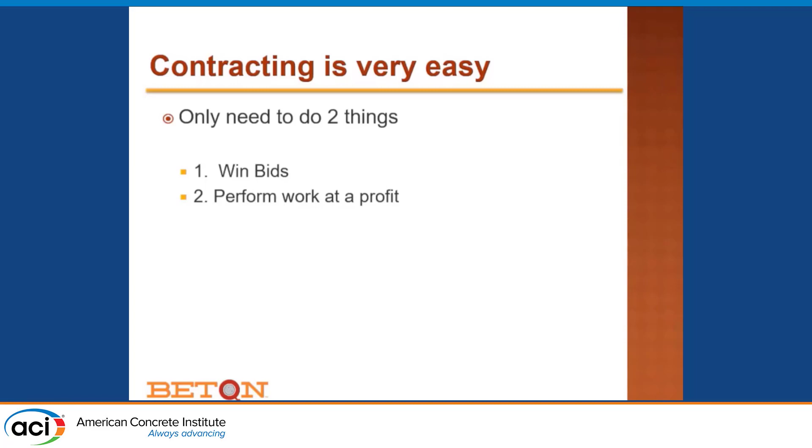But I also know, and I've told Bruce this a couple of times, that contracting is easy. I don't know why everybody complains about it. It's the easiest thing in the world. Engineering, we have to worry about loads and people we're never going to meet, and uncertainty and tolerance. Contractors, dead easy. You just have to win bids and then perform them at a profit, right? If you don't do both of those things, then it doesn't matter. This is so simple. And often the problem is that you've won the bid thinking that it says one thing, and then you try to perform it at a profit, and you find out that there are some expectations that you may not have been aware of.

I see there's a fellow here in the lower left-hand corner with a beard. He doesn't have a Hawaiian shirt on. He's wearing a Roman-style Hawaiian shirt. It's made of plates of steel. This is on Trajan's Column. They're building the bridge across the Danube. Up in the corner, they're mixing concrete. The architect and the engineer have come to the site, and they are looking up for inspiration. The last thing they want to do is look down and see how out of tolerance construction is being made.

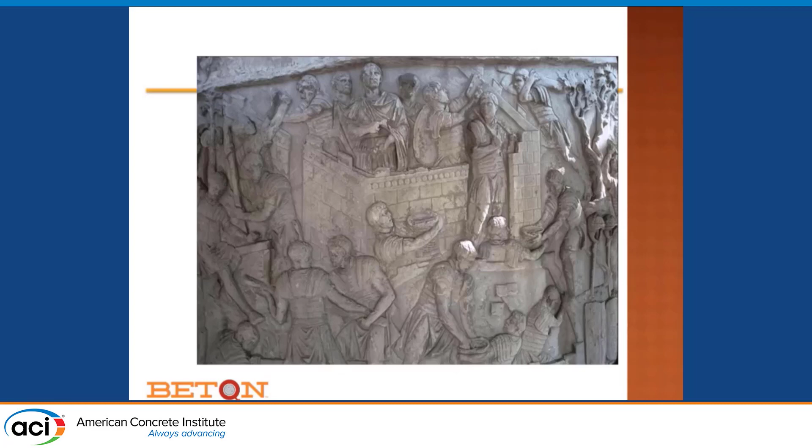One of the things that Bruce contributed to this process of concrete construction is the understanding of who's responsible for what. If you have a problem, and problems occur in construction, is your repair a betterment? Are you repairing something because it wasn't constructed properly, but building it to a higher standard than it was originally specified to meet? That's a betterment, not a repair. The other that we see all of the time is the passing of the requirements of the building code, ACI 318, back to the contractor.

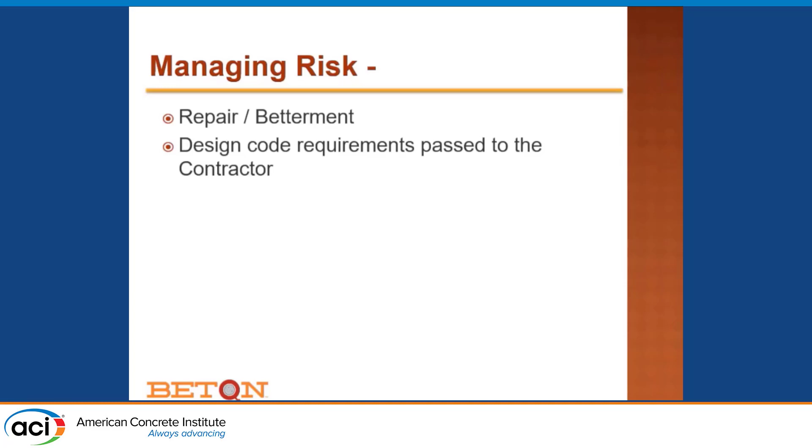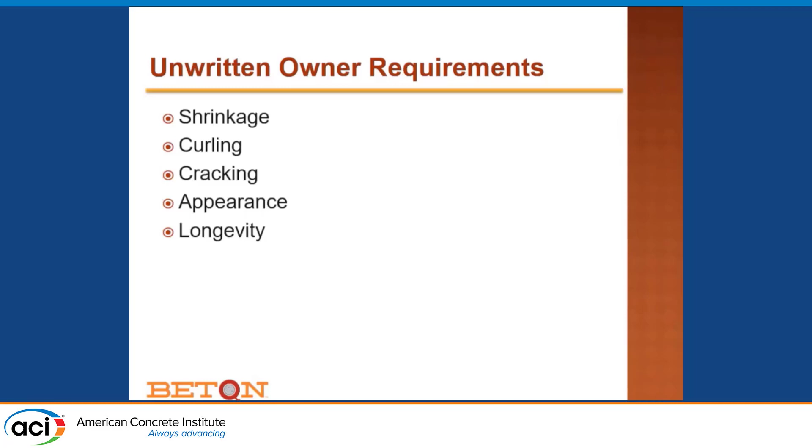It's totally inappropriate. Bruce has written volumes on that very topic, because we have a bunch of unwritten owner requirements that we only find out about during the execution, during phase 2. You've got the bid, but you wish now you didn't. You've won the project. You have problems with longevity, with appearance, with cracking in the structure, curling of slabs, shrinkage of the concrete, all of these things that were implied but not stated in the specification. And to make sure that it gets covered fairly.

A lot of cases, workability, finishability, strength gain, cold and hot weather, Bruce has worked on all of these aspects to get an understanding between the contractor, the designer, the subcontractor, the material supplier as to what it is that we're actually going to try to execute. And he hasn't done so to the sole benefit of the contractor. Mike Ahern quite clearly stated that it's always to do what's right.

And we don't use this type of information. We don't use anecdotal evidence that once upon a time this guy put some fly ash in my concrete and the concrete opened up and I could see straight down into hell and there was a devil and he was eating fly ash and I knew it was a problem and that's why the issue occurred. Instead, we use data. And here's some perfectly reasonable data.

This is the total U.S. highway fatality rate and the fresh lemons imported into the USA from Mexico. So clearly, whatever is being drunk with those lemons is causing fatalities. This is the famous causation and correlation.

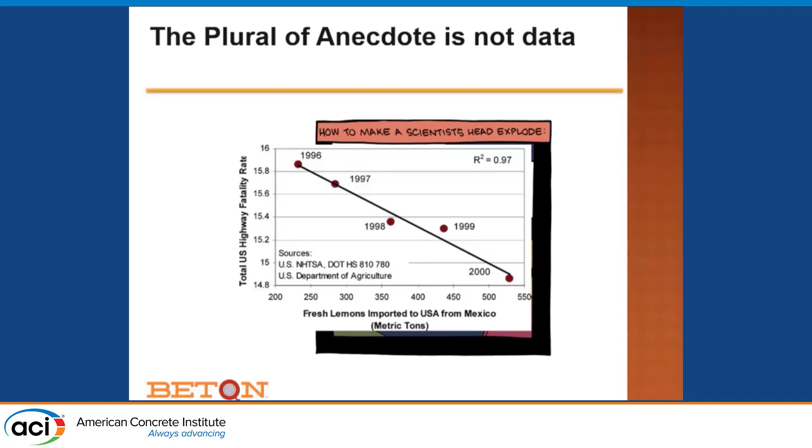But we have to remember that people no less than Bryant Mather tell us that we have failures in construction that occur only for two reasons. Number one is the contractor didn't follow the specification. Very rarely do we talk about the second part. The specification was in error. It couldn't be constructed the way that it was written. And that becomes a problem.

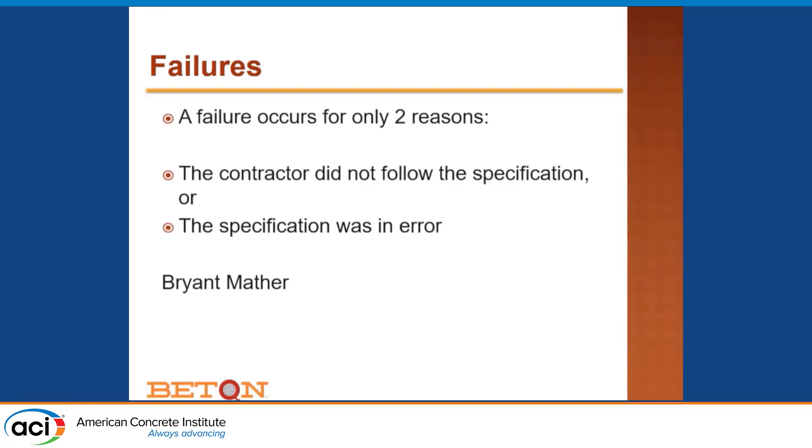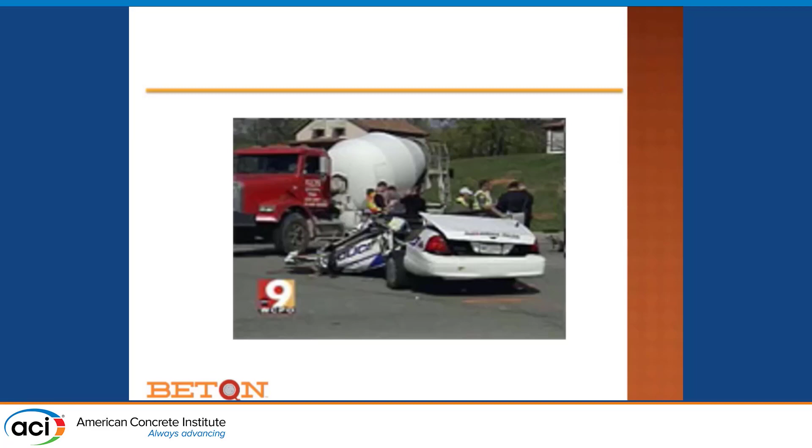I've done an awful lot of work in concrete with almost no Portland cement in it. But I've done that work cognizant of the fact that you actually have to build with it. I can make stuff in the lab that is fantastic. It has great performance, it has high strength, it slices, it dices, it makes julienne fries, whatever you need that concrete to do. But you have to cure it at 100 degrees Fahrenheit for 7 days. How are you supposed to do that on the site? I'm just a lab guy. That's not my problem. Bruce never took that approach. Bruce took the approach of saying, you need to understand.

And often what happens is that I would develop mixtures when I was at Semstone that would have very little cement in them, and someone else would try it without understanding the admixture packages that were going into making it work. And then 3 days later, when the concrete won't set, they call up and say, your mixture. And I said, what do you mean my mixture? It came out of someone else's ready-mix trucks. But we got to fix that anyway. So you need to be careful.

And this is the type of advice, the type of practical, sound engineering judgment that we all need more than ever as we creep towards a situation where we use as little clinker as we possibly can. And there are going to be consequences. And we're not changing away from Portland cement because we think that it doesn't work. We're changing away from Portland cement because there are political ramifications and emission ramifications to its use. So we need to understand how they're going to work.

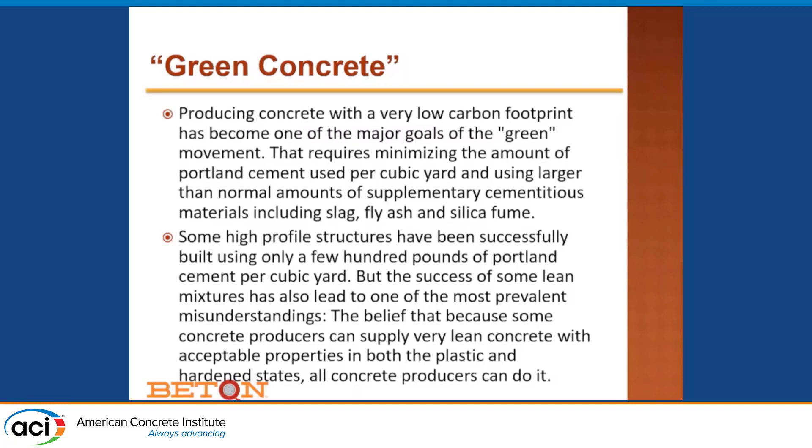Where did all of this come to? It came to this type of document. When I was running NRMCA's P2P committee, we needed to have some documentation that was more than just, we know what you need, we'll put it into the concrete, you can trust us, right? That violates number 2. You've got the bid, but you really don't want it.

I put this up to scare Bruce. I think this is a very nice archaic antique, used more than a century ago to measure some property of concrete that isn't really very important. And we still use it today because we need to have something to do with those broken tape measures, otherwise we'd be throwing them away.

Imitation being the sincerest form of flattery. When I've written specifications, I write them that the slump shall be consistent with the method of construction with no visible signs of segregation, and we describe segregation using an ASTM test method. And it's very interesting to watch the reaction of the testing agency that says, well, what is the slump supposed to be? Whatever the contractor needs it to be, who cares?

Well, how will we know what we're measuring to? Well, the specification goes on to say you have a 2-inch range. It'll be on the ticket. Well, how will we know that that's the right number? Yeah, you're not getting the whole picture here, right? I mean, the slump is very good if you're a ready-mix producer. Use it all the time. Are we making the same concrete? Because if we don't have the same slump coming out of the plant and we think we made the same concrete, we're bullshitting ourselves, right?

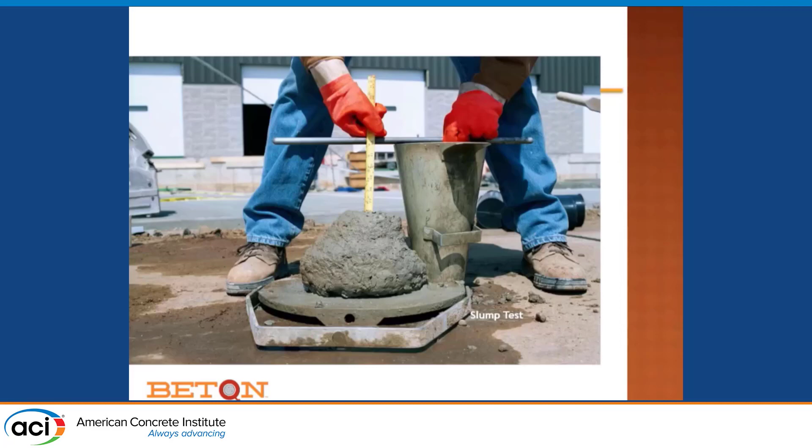But if you're now going to place the concrete, if it's a 2-inch slump or a 12-inch slump, I guess if you're a Puritan, a 2-inch slump means that the laborers will work hard and they'll be tired and won't go out and do any carousing at night, and that will be good. Although laborers that get tired and use that as an excuse not to go out drinking usually aren't very good laborers, in my experience. Right?

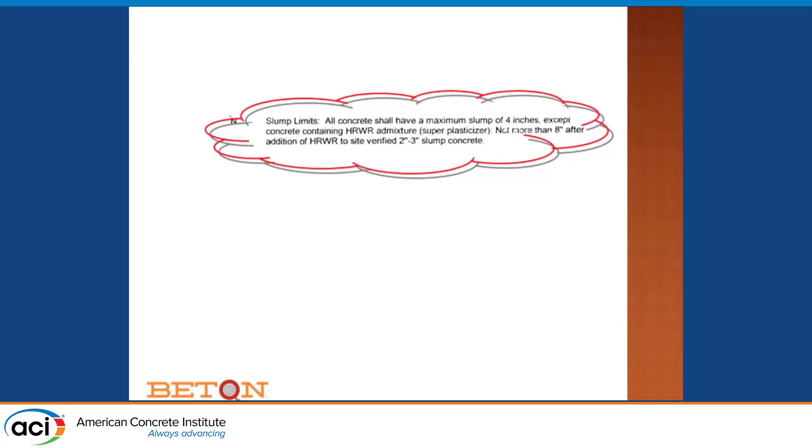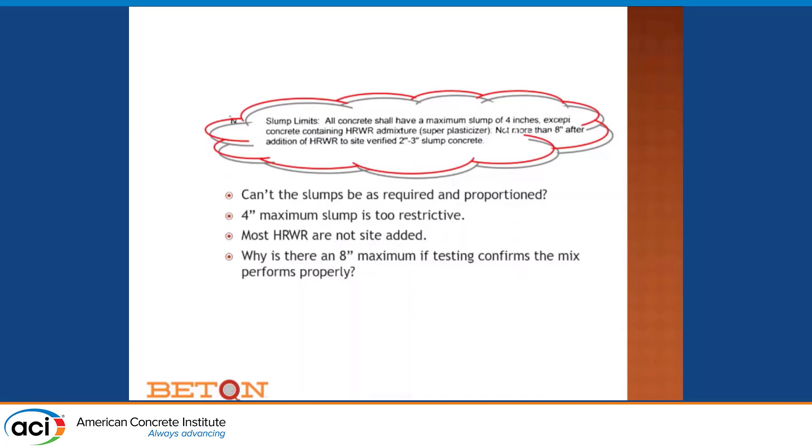We still see specifications written like this despite the work that Bruce has done. But Bruce has shown us the light that we can all go along. You can add high range water reducing admixtures being added at the site. It's the dumbest thing you can do. It's the best way to get air into concrete that's not air entrained. Can't we have the slump as required? All kinds of problems with this construction. And sometimes it's because we rely on the quality of our concrete based on measures that are not good measures of quality of concrete.

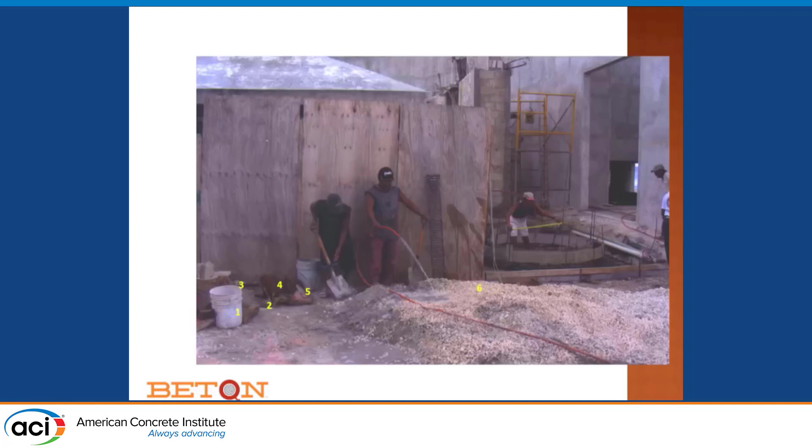I counted here. You can see I've labeled them for our use. This is a 6-sack mixture, so you don't need to worry. You can see that there's a couple of things going on here. One is that the batchman and the yard man are getting ready to mix, and the contractor's been worried about yield. That's why he's back there measuring. He says, those guys are way too happy. There's something going on. We have to understand all of these tolerances, and a 6-sack mixture is a silly way of doing things. Similarly, self-consolidating concrete isn't always magic.

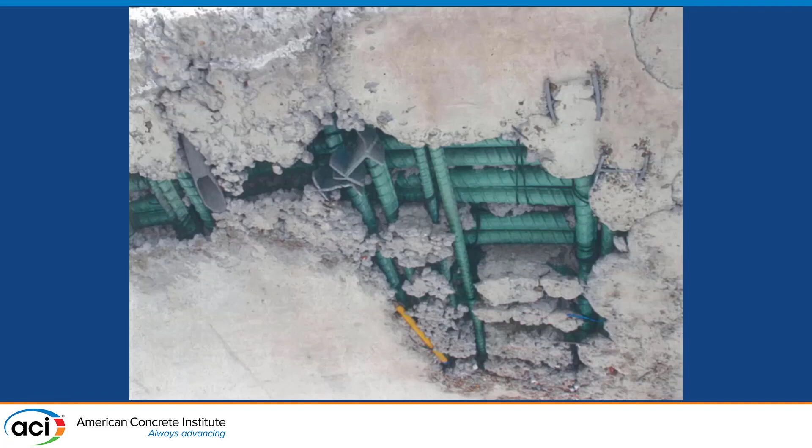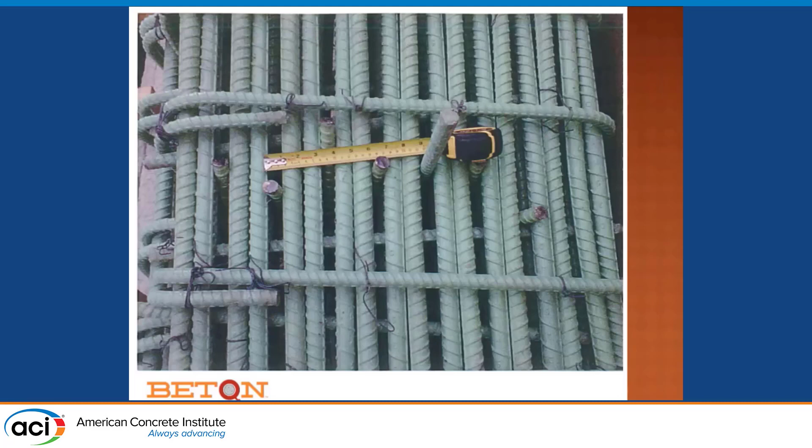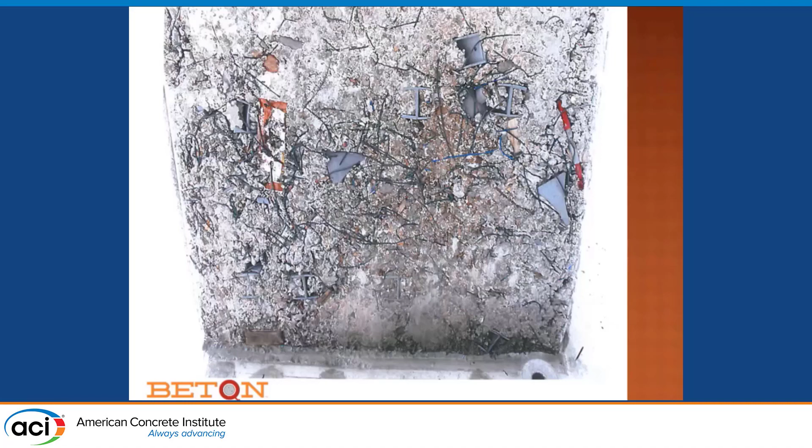A lot of concrete is done with a tolerance. The nice thing is you can find your pencils afterwards. There might be a little bit of steel in this structure. And no matter how good you are with self-consolidating concrete, you probably can't make that work. I wish this was other than a real project. You need to clean up your site. Otherwise, you find out where all that wire that you cut is inside of the forms. This is architectural concrete, right? We have a lot of definitions of concrete exposed to view.

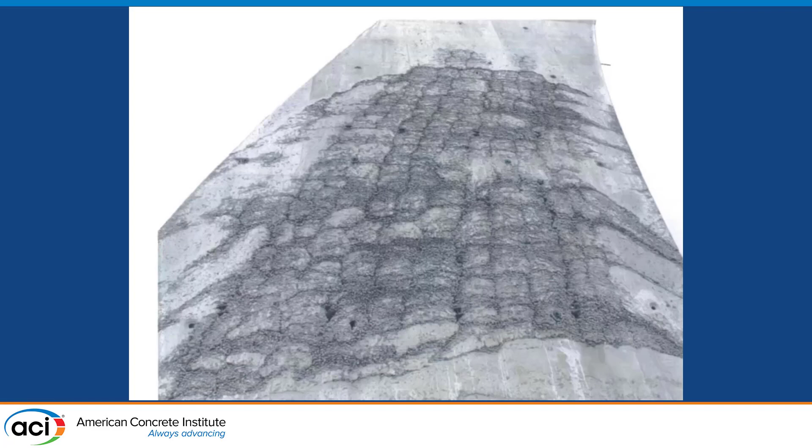And finally, if you don't understand the placing techniques, there's no magic. This was Bruce's great contribution, to continue to apply data and reasonable engineering approaches to solve problems. These are people who believe that self-consolidating concrete was somehow magic. It isn't, as you can see. Bruce, working together with Ward, would routinely challenge the orthodoxy in this industry with actual data. How to plan a cold weather concrete pour is a fascinating article. It's getting older. I mean, it's not Bruce old, but it's old. And you can read it, and it's still very useful.

You can barely make out free fall of concrete. Free fall of concrete is something where the specification will say concrete shall not be allowed to fall more than 6 feet. If you read Bruce's work, that seems to be a fairly arbitrary number. It's almost as arbitrary as what's still in ACI 306, that the concrete can withstand one freezing cycle once it reaches a strength of 500 psi. Because why? Because 500 psi sounds like a nice round number. Does it come from anywhere? Probably not. But let's take a look at some of the things that Bruce has contributed to.

If we go to hot weather concreting, it will tell us that one of the ways to avoid plastic shrinkage cracking is to erect a windbreak. This is a table from one of Bruce's publications showing you the windbreak type that you're using and how high the windbreak has to be, which is H, to protect a zone of width W. And so it points out correctly that to protect a 30-foot wide placement, you need a 4-foot high piece of plywood or something else solid.

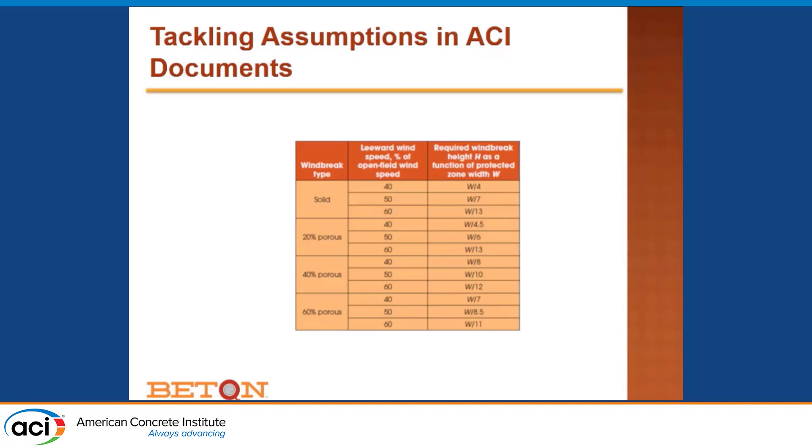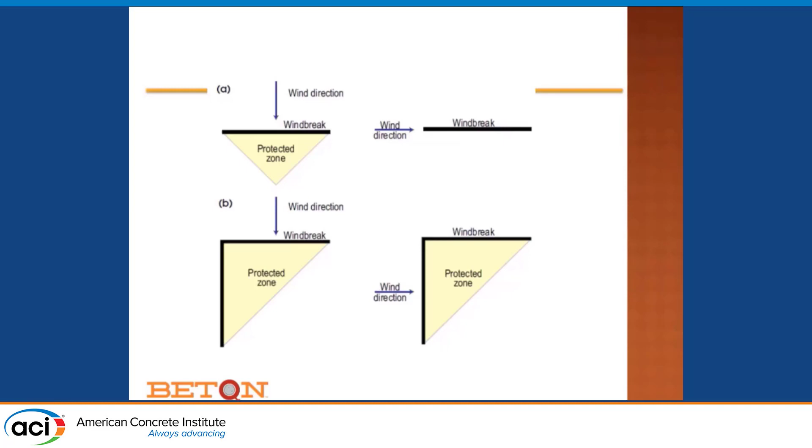What that's anchored to when the wind is blowing at 50 miles an hour could be very interesting. So this type of information and where that windbreak really protects leads us to very practical solutions of saying erect a windbreak. It sounds like a great idea, but what is the geometry of that windbreak? Bruce did the calculations.

Massive embedments, still a big problem. We watch in Minneapolis every winter people going around with a weed burner trying to raise the temperature of steel in the air at 20 degrees or at minus 20 degrees. And it probably gets up to above 32 degrees for a few seconds, but it rapidly radiates the heat away.

Work done very recently shows that a number 14 bar, for that matter anything smaller than a number 18, are not massive embedments. They don't need to be heated. And this was done not because it's easier for the contractor. It's done because we're wasting time and effort heating up bars that are going to heat up in the concrete anyway.

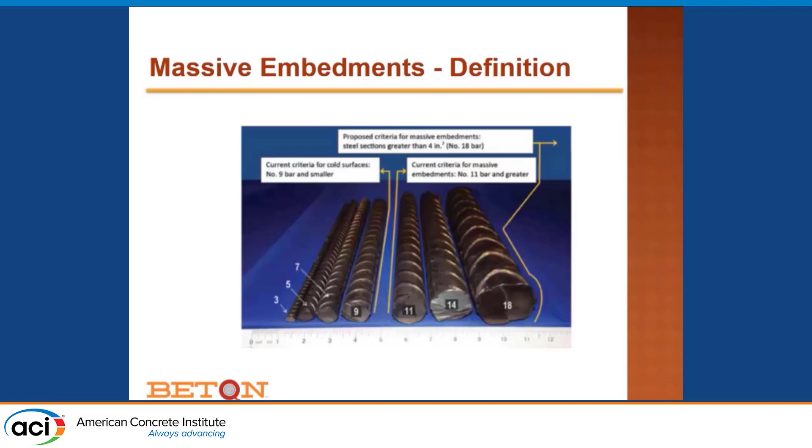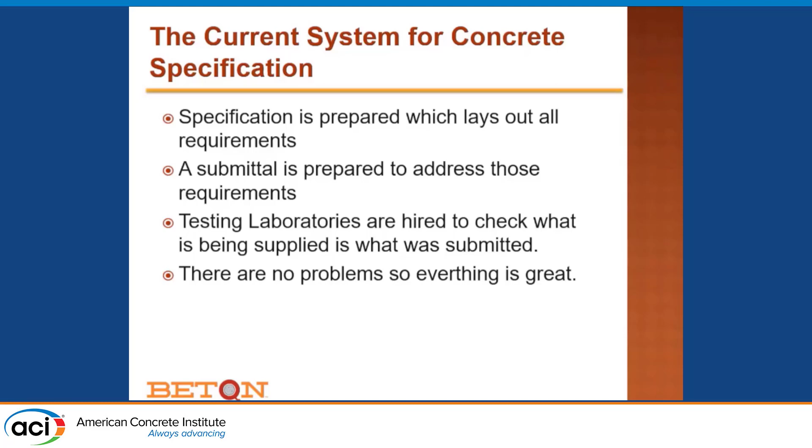We have lots of problems with our current system, and Bruce has been able to help us out a great deal, right? The current system works well. The specification clearly lays out everything you need. A submittal shows that the contractor follows those requirements. A competent testing lab is hired to check what's being supplied, and there are never any problems, and everything is great, right? And Bruce is among the first people and the leading person to highlight that's not the case.

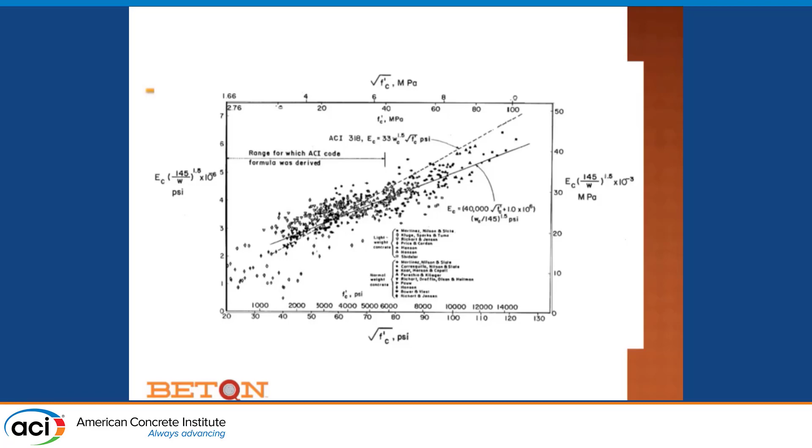How often have you been exposed to a specification that gives you a requirement for modulus of elasticity? This is the equation that is found in 318 for modulus of elasticity. The equation would be those straight lines, not the very large scatter of a couple million psi that occurs in all of the data. Right?

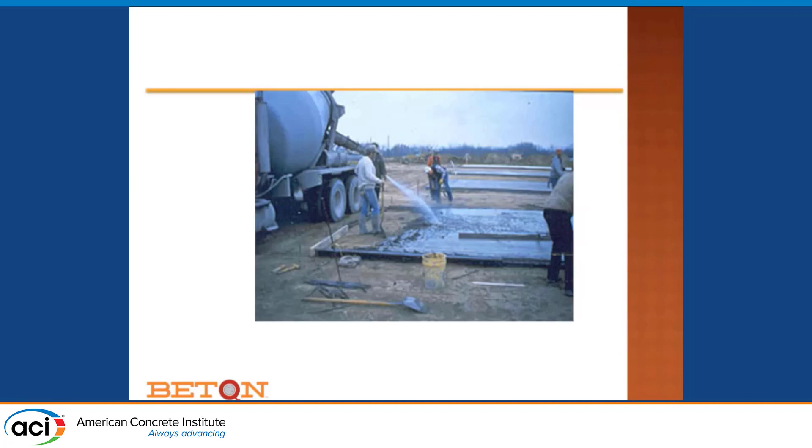We have performance-based specifications. Want my concrete to pour like Niagara, have the strength of Gibraltar, right? There you go. Do you need it louder or do you need it slower? This is a contractor who read the specification that said water shall not be added to the truck after batching. Right? I'm in compliance with the specification.

This is a labor-saving placement where we use green concrete that's going to set so slowly that we can take a break in the middle of the pour for lunch because it doesn't matter. It's not going to set for the next 4 or 5 or 6 or 7 days. So what's the difference?

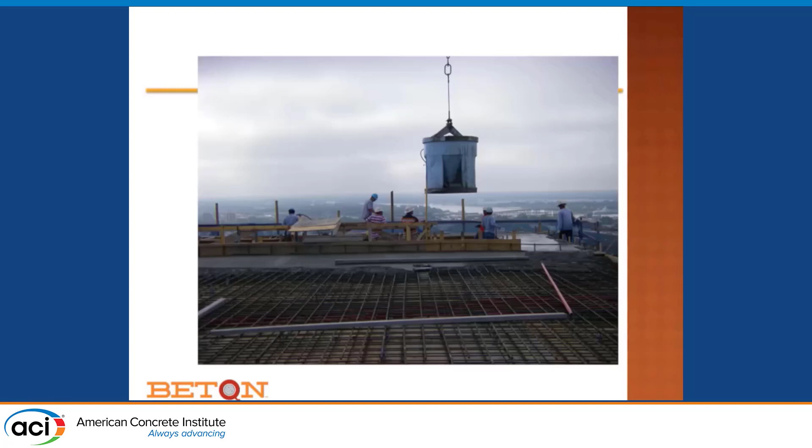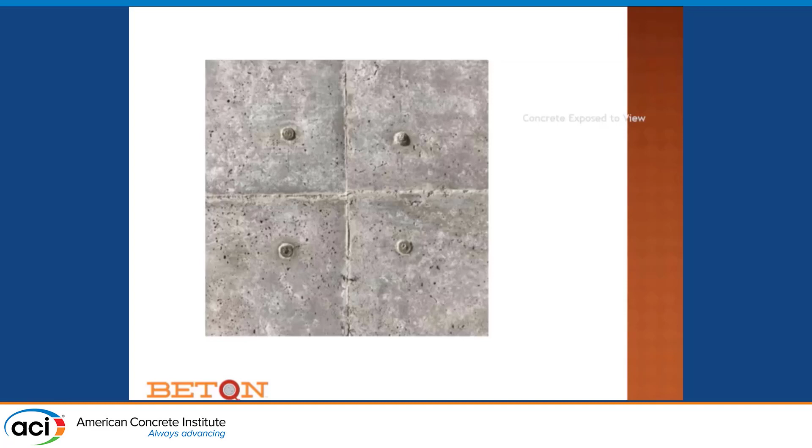Architectural concrete is somewhere else Bruce did quite a bit of work: what does concrete look like, and what concrete is exposed to view. For those of you who don't know, the definition of architectural concrete in the CT is concrete that will be exposed to view. So this looks nice to me, but you could often get in trouble. This one not so much. It's a very normal thing to see in a concrete placement on this exterior surface, but this is the material that was removed.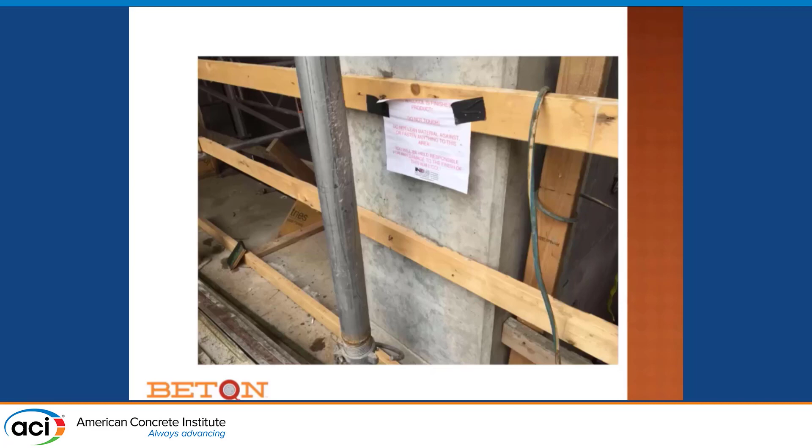And finally, we all know that there are really interesting people in the world, and Bruce is one of them. It's been my pleasure to work with him on committees and things, and to talk with him on various issues, and I was very flattered to be able to give this presentation. Thank you, Bruce, for all of your contributions.